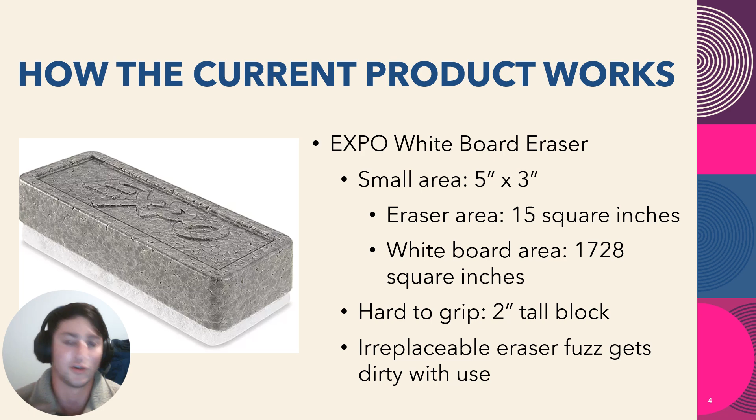How the current product works. So the standard whiteboard eraser is this Expo whiteboard eraser. It's 5 by 3 inches, which means 15 square inches. But compared to a standard whiteboard, which is 1700 square inches, it's completely off. The scale is incomparable, and that's why people get lazy. It's also hard to grip. It's just a 2-inch tall rectangular block, and the irreplaceable eraser fuzz gets dirty with use, and there's no real way to clean it. You just have to throw it out and get a new one.

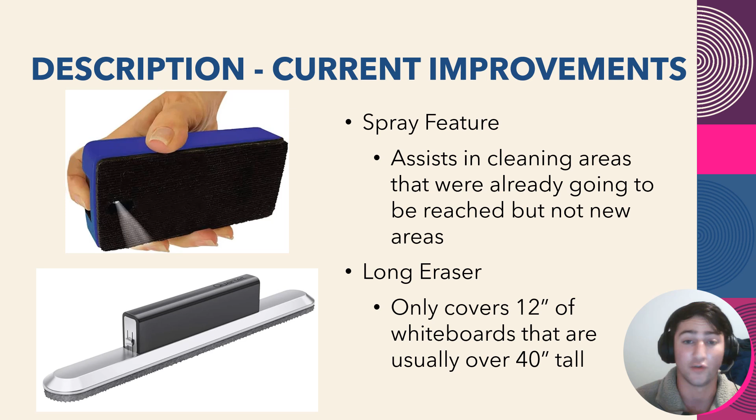So current improvements, there are erasers with a spray feature. This helps you clean the areas that you're already going to reach, but it's not going to help you get those edges and corners that normal people won't get anyway. On the market, there's a long eraser, but it's only 12 inches long, and we're looking at whiteboards that are 40 inches tall. I said over 1,700 square inches, so this is still not covering enough area.

My proposed solution is an extendable whiteboard eraser. It can cover between 12 and 24 inches lengthwise of whiteboard, with holes to adjust it every 0.75 inches. It also has an ergonomic rubber handle that is much better than just that square little block and is designed for ease of use, and the eraser only weighs about 3 pounds, allowing for swift and decisive movements across whiteboard surfaces.

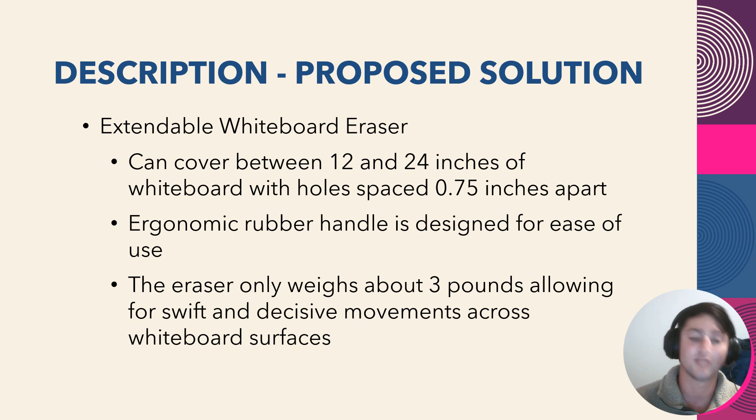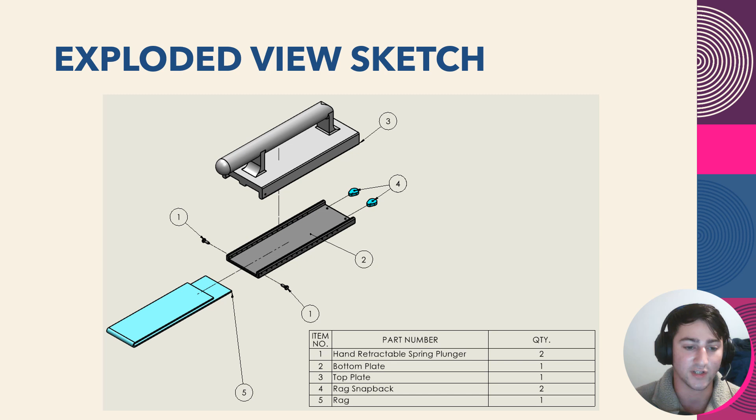Here's an exploded view sketch of the product and the CAD model we're about to look through. We can see just this 2D representation of all the parts that go in it. It's rather simple. We only have 7 components in here total. Very simple design that we'll get through now. So we'll start with the bottom plate. We see that the pinholes are every 0.75 inches for maximum customer customizability, and it's a thin yet durable design for a lightweight and strong feel.

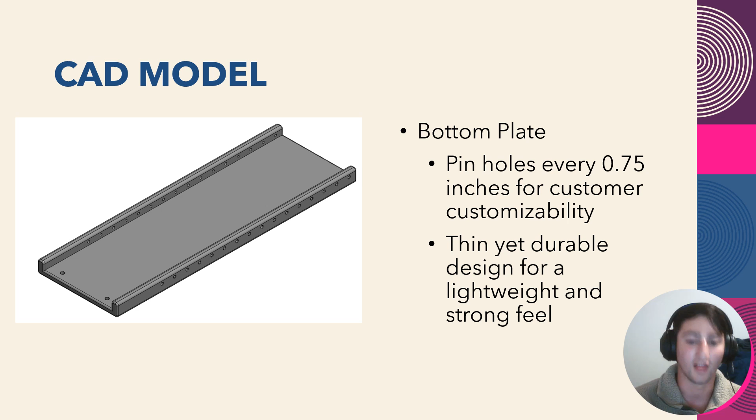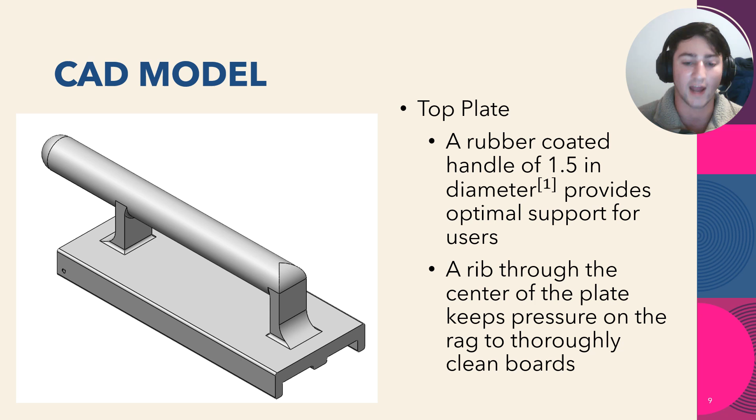Looking at the top plate, again I mentioned that rubber-coated handle of 1.5 inches diameter. According to the Canadian version of OSHA, this is the perfect diameter of a handle for it to be maximally ergonomic. As well as a rib that we can see in the bottom right of this image through the center of the plate that will keep pressure on the rag to thoroughly clean the boards. We'll look at that a little bit more when we look at a CAD of the whole assembly.

Looking at the hand retractable spring plunger, this is from J.W. Winco, it's a COTS part. So the way this works is that it'll be like a peg system. So you pull these out and you can adjust the length of the top and bottom plate and how you'd like to set it. So it'll be 2 plungers, one on each side, to set that length. One plunger only takes 1/2 to 3 pounds force to operate, which is ideal, right? That's well within a desired force when it's close to your body. And it also will screw into the top plate. We see the threads here.

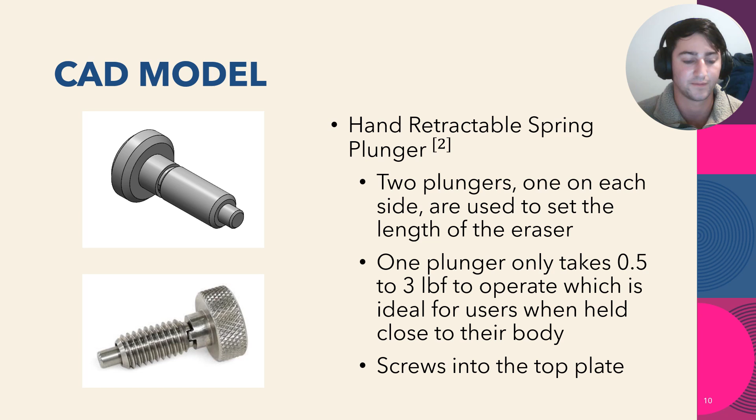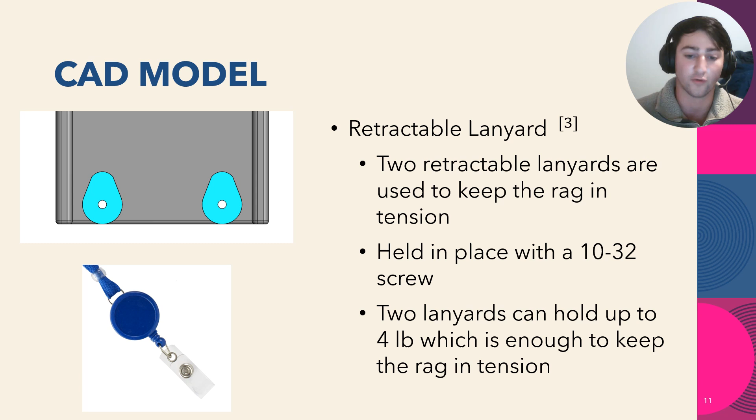Looking at the retractable lanyard, one problem I had to address was what to do about keeping the rag in tension. If you've ever seen a lanyard, it just pulls out and then retracts back in. So this will be clipped onto the end of the rag, so it'll keep it in tension. It's held in place with 10-32 screws. See, there's a hole in the middle for that. And two lanyards can hold up to 4 pounds, which is more than enough to keep the rag in tension as well.

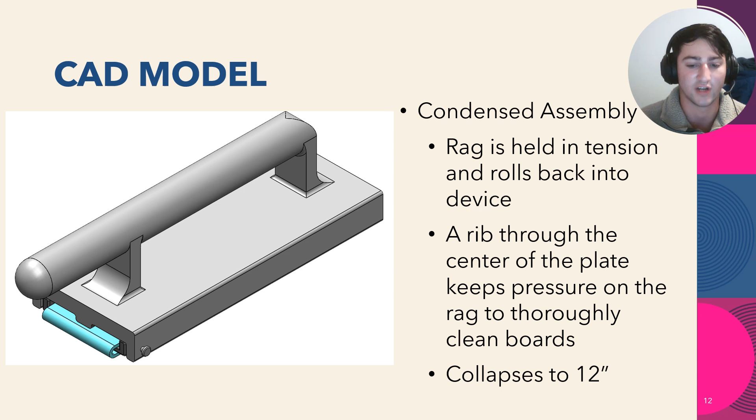Showing the condensed assembly in its 12-inch format. Again, the rag is held in tension and rolls back into the device. We see that rib here on the left, keeping pressure on the center of it and collapsing down to 12 inches. And the extended model, obviously it goes up to 24 inches. A longer handle, which juts out here, allows users to hold the eraser in the center, the middle, even when extended.

And the rag will be pinned to the top plate, so as you extend the top plate from the whole design, the rag moves with it and stays in tension the entire time. And we can see that rib here on the bottom right: as you press against the board with the eraser, the rag hits that rib and it stays firm and is able to erase things off the board.

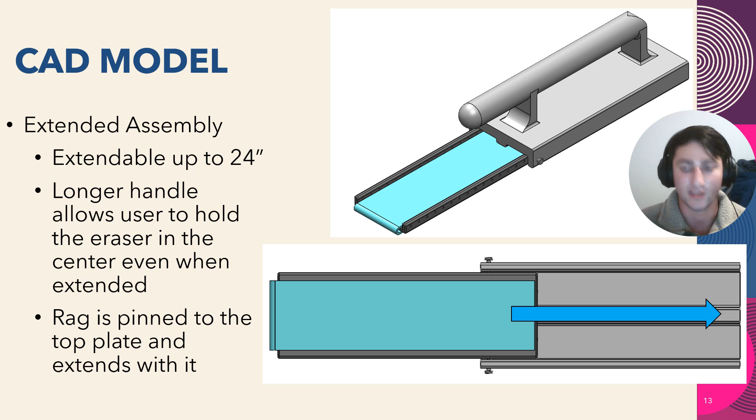Looking at possible manufacturing processes, we're looking at injection molding for the top and bottom plate. Injection molding can create detailed geometries precisely and consistently, which is super important. And even more important, it creates strong yet lightweight parts, which is crucial to this design because someone is extending it from their body as they clean. And it can lead to cost savings after initial startup, so it shouldn't be too expensive to move from the Expo whiteboard erasers to this new extendable version.

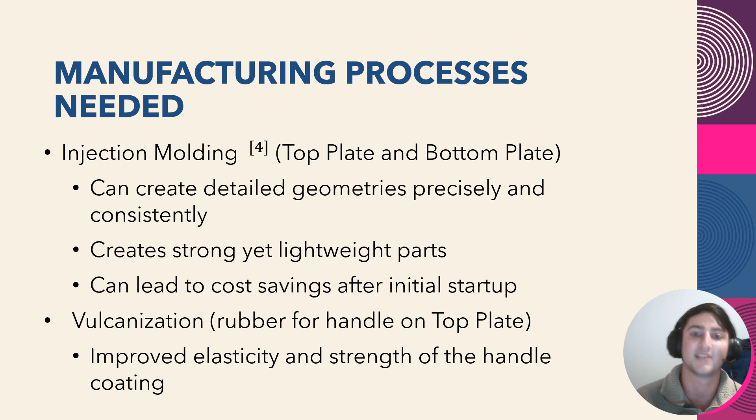We're also looking at using vulcanized rubber on the handle for the top plate to improve elasticity and strength of that handle coating, and make sure it's really tactile.

Looking at required materials, we're using ABS plastic for the top and bottom plate. It's a durable material known for impact resistance, which will be important as you put it on the board, as well as toughness. It's also very cost effective; again, I talked about keeping it within a similar price range to the Expo whiteboard eraser. For the rubber on the handle, I picked that because it's a durable, tactile, grippy material. And the hand retractable spring plunger is made from stainless steel, because it's a high durability material, especially for a part with many loading cycles like this one will experience.

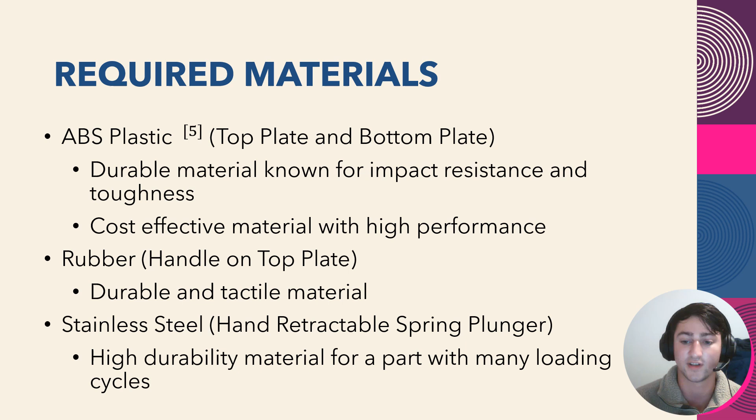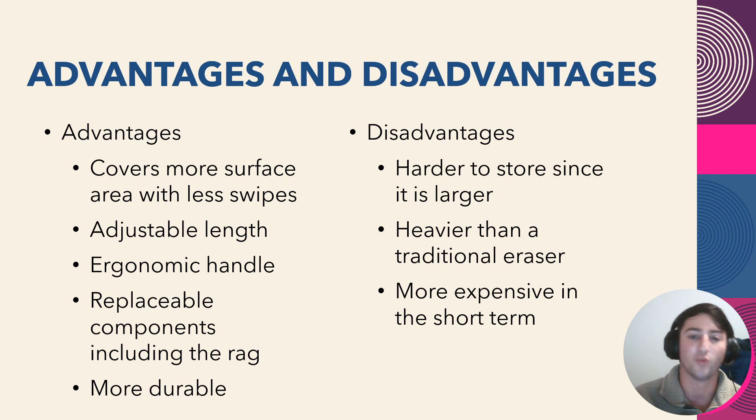Advantages and disadvantages of this product. Advantages: it covers more surface area with fewer swipes. It has an adjustable length, an ergonomic handle, replaceable components including the rag, which is a big selling point, and it's more durable. Disadvantages: it's harder to store since it's larger, and heavier than a traditional eraser, but hopefully not by much. It's also more expensive in the short term, but in the long term, since the rag is replaceable, it should be okay.

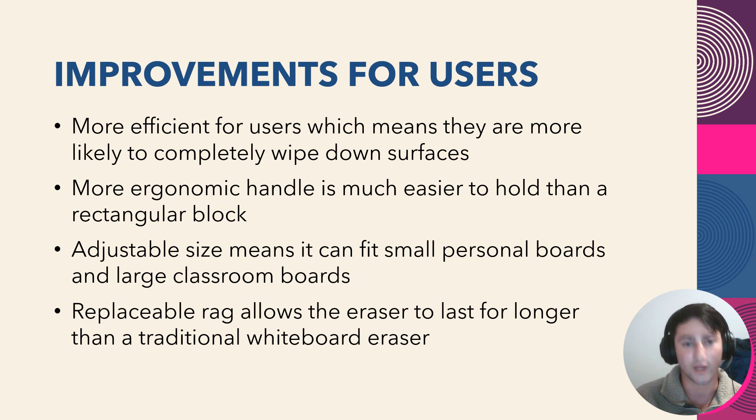Improvements for the user that I made. It's more efficient for users, which means they are more likely to completely wipe down surfaces, so it's good for the owners of these whiteboards, like universities such as Georgia Tech. It's also a more ergonomic handle, which means it's easier to hold than that rectangular block. It's adjustable in size, so it can fit small personal whiteboards or large classroom whiteboards professors use, as well as the replaceable rag, which allows the eraser to last longer than a traditional whiteboard eraser.